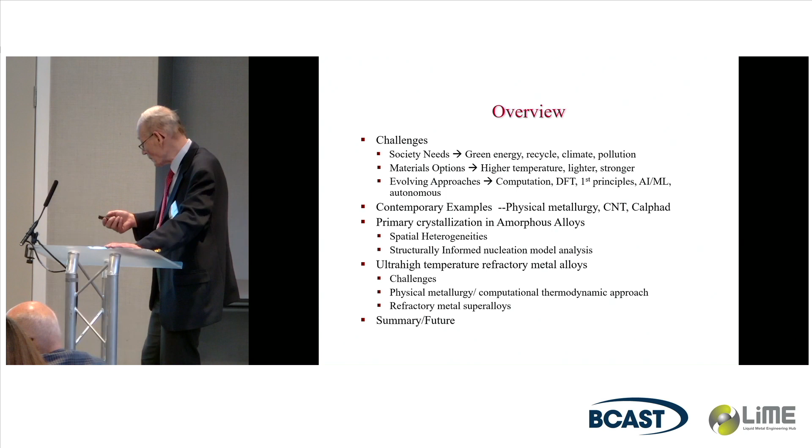So glass formation requires bypassing nucleation and growth. You can do it either with nucleation, such as window glass, or with growth control. Here, you recognize that the maximum growth rate is above the nucleation rate in terms of temperature. So you can quench in a material that has either some quenched-in nuclei or growth-inhibited phases.

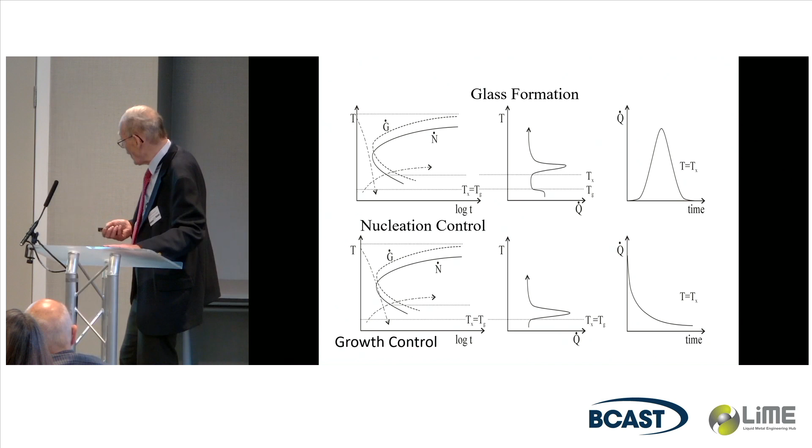And that was what we thought aluminum alloys were like. Lindsay put together this compilation and shows that the amorphous alloys, when they're partially crystalline or nanocrystalline — I'm afraid to use this pointer — actually go beyond the conventional alloy islands into the engineering ceramics.

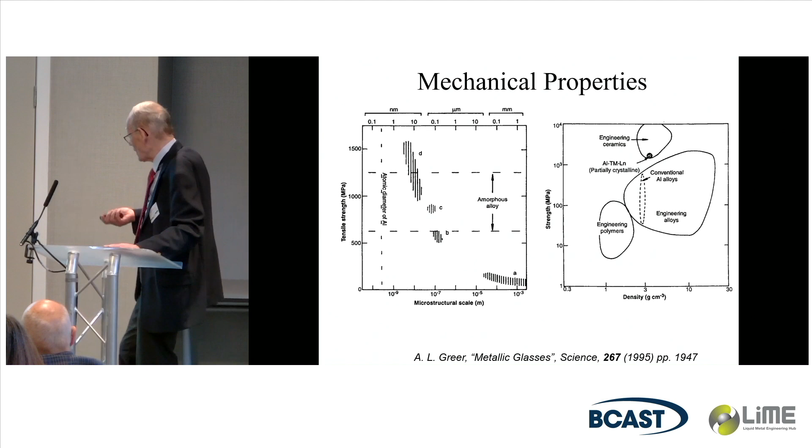So these are very attractive, being lighter and stronger, and on a specific scale, approaching steels. And this is the typical

crystallization reaction. The primary crystallization is one where you get this aluminum in an amorphous matrix, and because of the very high density of nanocrystals and the rejection of yttrium and iron, the growth is inhibited so that you can maintain that size. You can see before final crystallization, you have about a 75-degree temperature range up to about 350 or more. That's pretty good for an aluminum alloy.

And it clearly has to be heterogeneous nucleation because our compositions are hyper-eutectic, and you would expect some compound to form, like in aluminum samarium. The driving force for formation of aluminum is half that for the intermetallic phase. So there has to be some heterogeneous nucleation site to promote the primary aluminum.

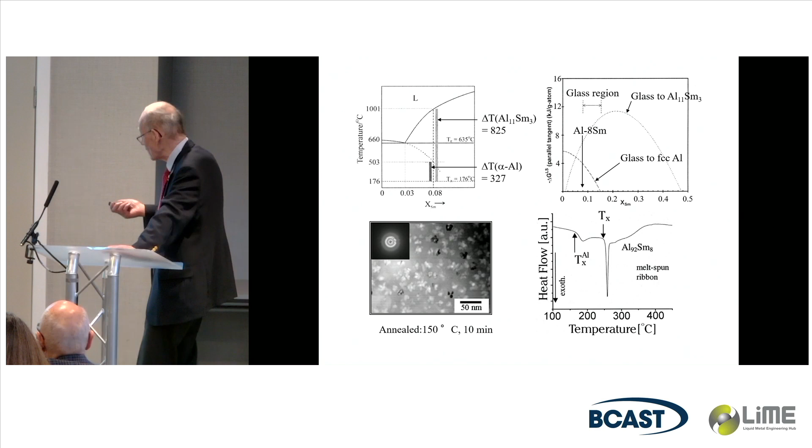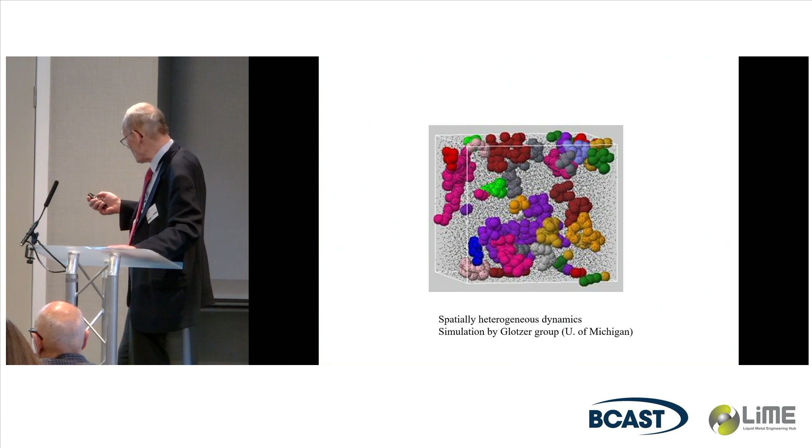And that turns out to be spatially heterogeneous groupings, and these are dynamic groupings. This is a computer simulation from Sharon Glotzer. But we have seen them in actual practice, and that's with a colleague of mine, Paul Voyles.

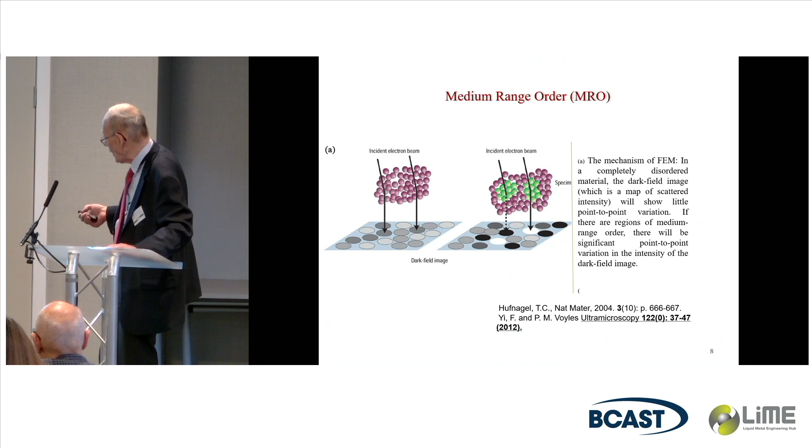We use fluctuation electron microscopy. If you have a situation where you have a spatially homogeneous material, then the fluctuation electron microscope image is mostly uniform in its intensity in the dark field image. But if it's spatially heterogeneous, you have groupings of atoms that are close together, then you're going to get intensity variations. By analyzing the intensity variations, you can back out what the type of clustering is, and the density, size and number density.

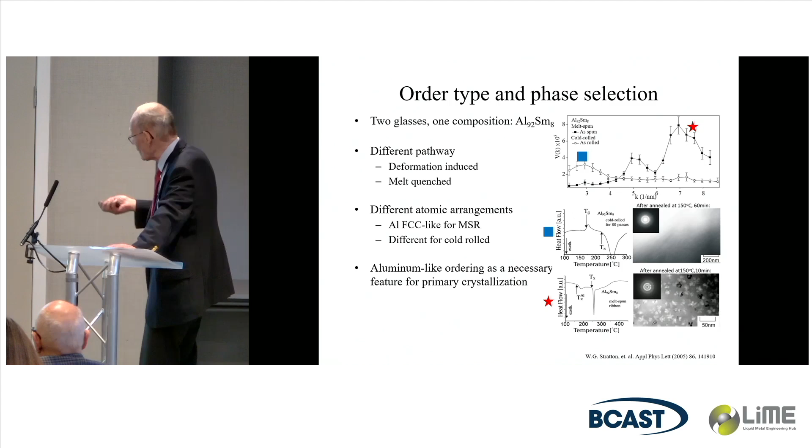And we've done that for these aluminum amorphous alloys after they've been quenched into the glassy state. It turns out that they have aluminum in their medium range order. So what that looks like is this: we have an aluminum-rich region which is not crystalline, so we get some constructive interference, but not enough to give diffraction spots. The solute atoms, iron and yttrium and others, are outside. So this is different than what other people have talked about with solute-centered clusters. These are naturally occurring, and it's not surprising since this has more than 88% aluminum, so you would see this.

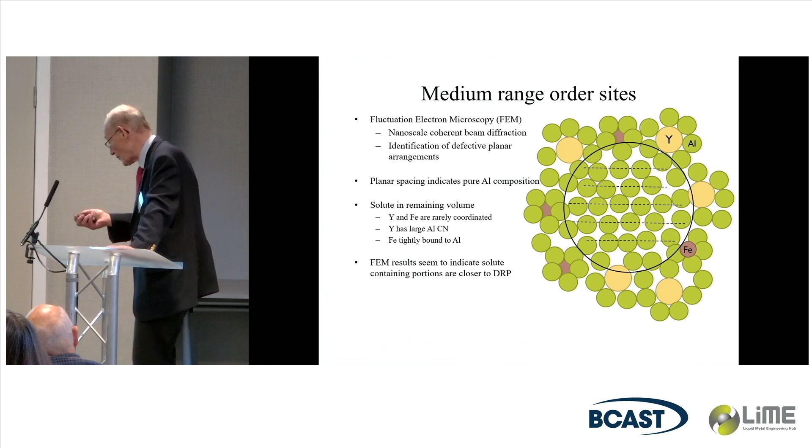But it's still amorphous, and so we want to account for the crystallization behavior. We measure the number density as a function of time at different temperatures. So this is our model: we have this aluminum-rich region that's a medium-range order, about a little bit less than a nanometer in radius, and it's surrounded by this nanocrystal.

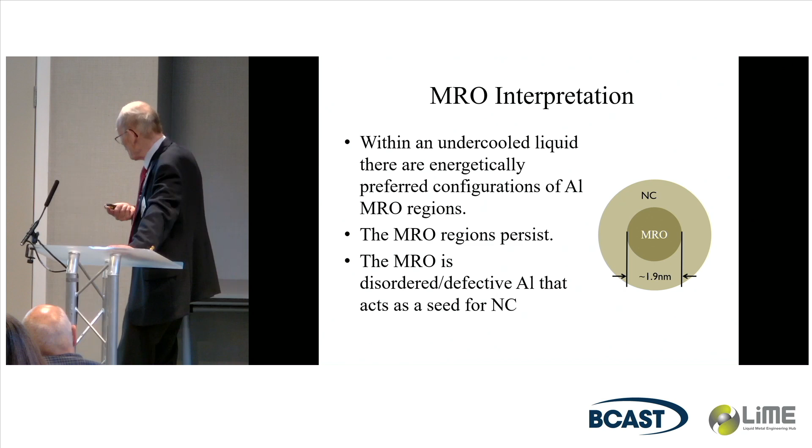So we replace the amorphous-MRO interface with a nanocrystal-amorphous interface and a nanocrystal-MRO interface, but that's very low in energy. And you can go through the seeded nucleation behavior.

And with this, you replace those interfaces. Because the MRO takes up part of the volume, it's a very effective heterogeneous nucleation site, and it's chemically the same as the nanocrystal. So we have complete wetting, and it acts as a very good seed.

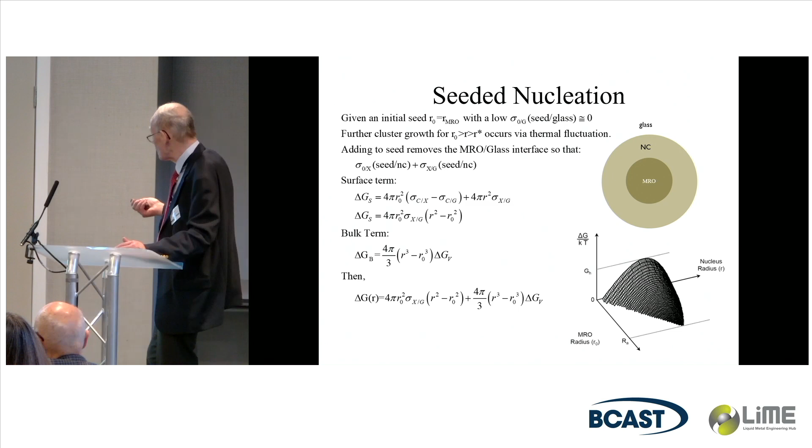When we go carefully through the interfacial energy using Spaepen's model and the driving free energy, which required a full CALPHAD evaluation rather than a simple undercooling approximation, we find the critical size is about 1.3 nanometers, which is bigger than our core of 0.96. Using the free energy and the interfacial energy, we find the barrier to nucleation is about 33 KT, which is all reasonable.

My student came to me very excited: it fits, my calculation fits the data. I said, yes, but it's on the wrong side of the peak. We're heating up, and your points match the calculation on the high temperature side.

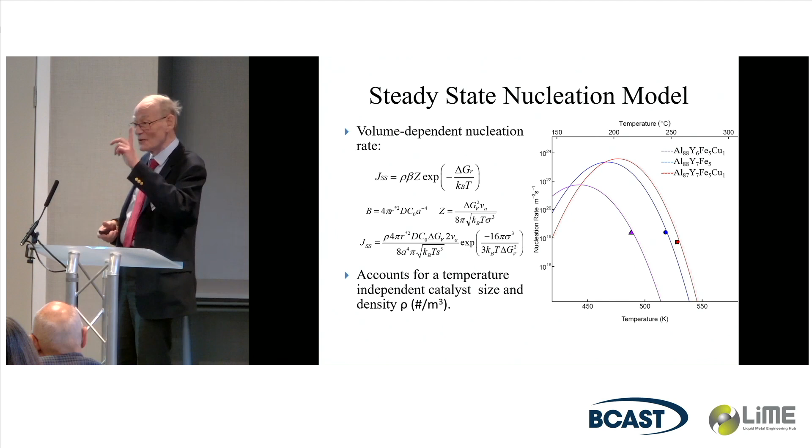What's going wrong? I want to remind you we didn't start at zero time. You put your sample in and start annealing, but no nanocrystals form initially. It takes some time before the first ones appear - this is a delay time. This tells us we have transient nucleation, which is very important, and is actually the main reason this forms a glass.

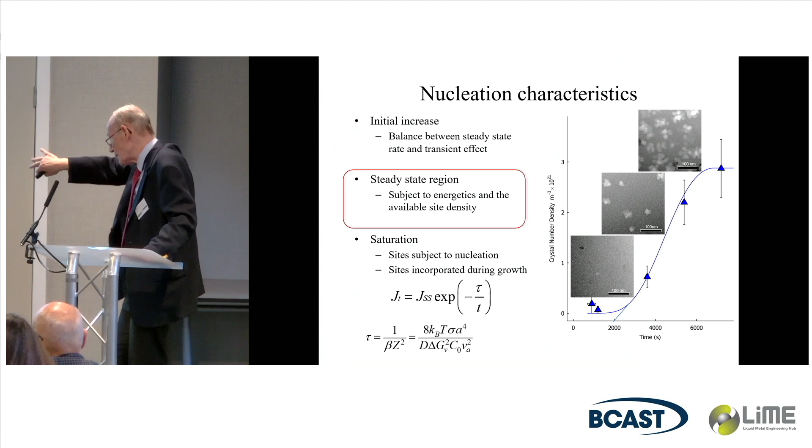So we had to measure the delay time. You can extrapolate the linear portion, but that's kind of uncertain, so we used...

nanocrystallization studies in a nanocalorimeter. Mettler produces this flash DSC, and by going at higher heating rates, you can pick up the glass transition very nicely. The Kissinger plot of glass transition versus primary crystallization allows us to separate the two.

Then when we anneal samples, we looked at them at different times. Measuring the glass transition, we have one slope associated with structural relaxation in the glass. Then once the nanocrystal appears, the composition of the amorphous phase changes, and we get a different slope because the glass transition temperature changes with annealing.

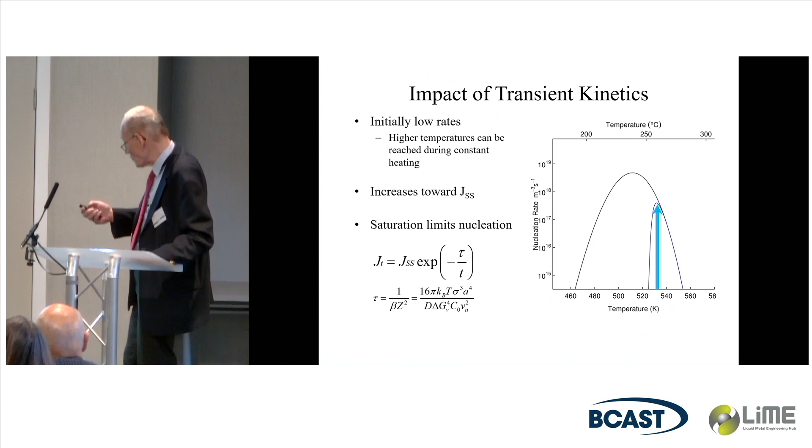That break point is a very accurate measure of the delay time. Using that, we've shifted the curve to higher temperatures, and now we have very good agreement. The curves fit our experimental points nicely, and we've gone through the whole analysis, carefully documenting each step.

When we do that, we have - Lindsay should be here - an independent test of plotting the log of the nucleation rate times the delay time versus delta G star over KT. There's good agreement between theory and experiment. So classical nucleation theory works, but you have to evaluate the parameters carefully. A lot of people take gross approximations and say theory failed. Well, that's not quite true.

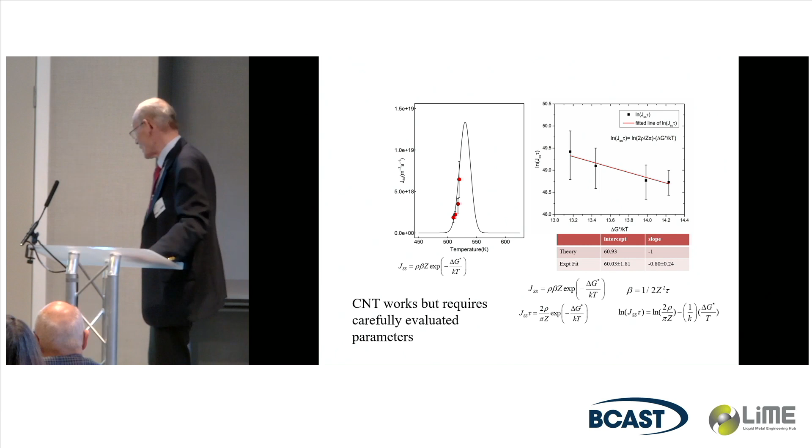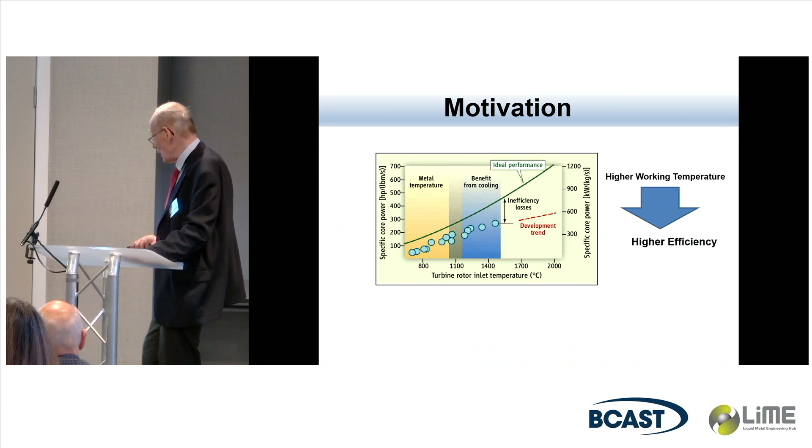So the motivation for high temperatures is shown here. Like Brian's, this is my most highly cited science paper - it gets not thousands, but hundreds of citations. It's clear that putting more effort into increasing the operating temperature another 10 degrees, which would cost a billion dollars and only return a few million in profit, means you have to question whether we're going to push these nickel-based alloys much higher. They're already operating above their melting point, and only survive because of the thermal barrier coating and the internal cooling.

One of the systems we've been looking at as part of an ARPA-E program is the moly-silicon-boron system. Here there's a black triangle between a molybdenum solid solution and Mo3Si phase, and a ternary intermetallic Mo5SiB2. This phase is very densely packed and has a very high melting point - the liquidus temperature is above 2100 degrees Celsius. So these alloys have excellent high temperature properties compared to the latest generation of nickel-based superalloys, with creep rates orders of magnitude lower.

However, they have limited ductility and undergo a ductile-brittle transition. Their oxidation resistance is good, but not great enough - the recession rate is a little too high. So these are issues that have to be solved. I want to point out that the T2 phase, this ternary intermetallic, is not a line compound - it has a width to it, a homogeneity range.

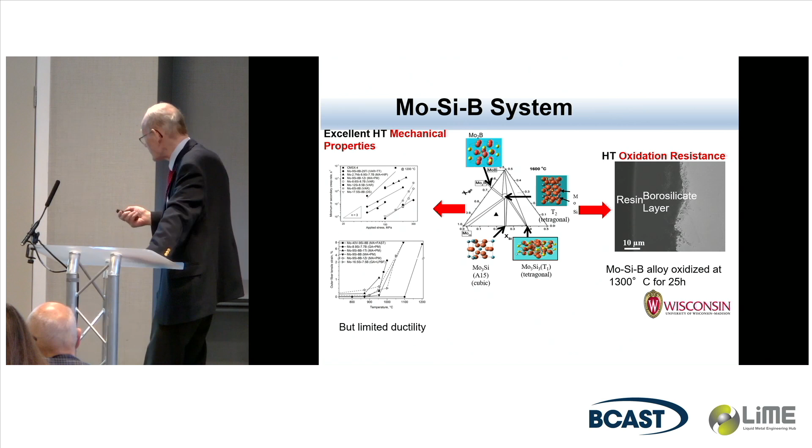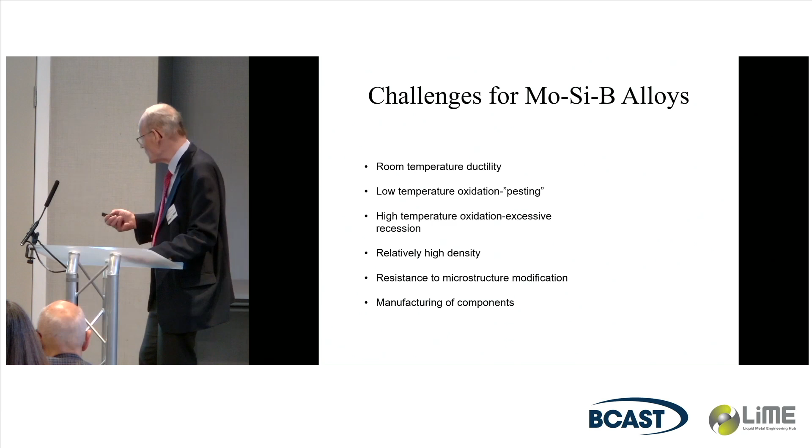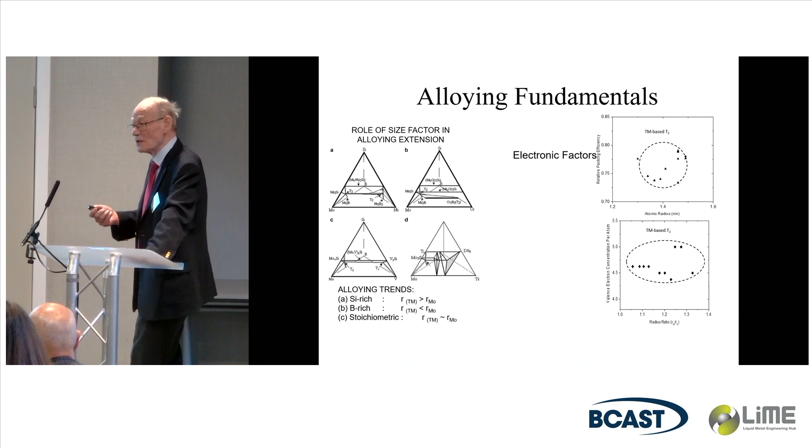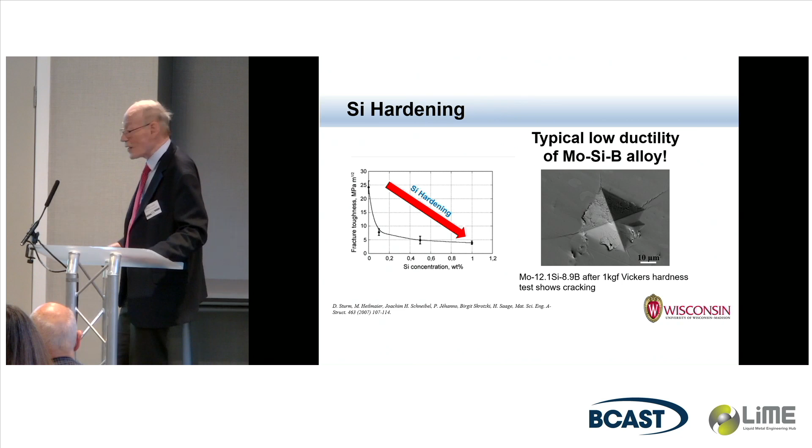So we've solved each of those problems. The first is using what I call the Hume-Rothery rules of intermetallics or silicides. We have a size difference and electronic factors that allow us to predict solubilities with good accuracy. We've looked at the literature, and there's reports that the problem with molybdenum-silicon-boron is the silicon. Silicon is the most potent solid solution strengthener in molybdenum. We have too much strength, so we have to reduce the silicon content. But how do you do that when you have a guaranteed solubility?

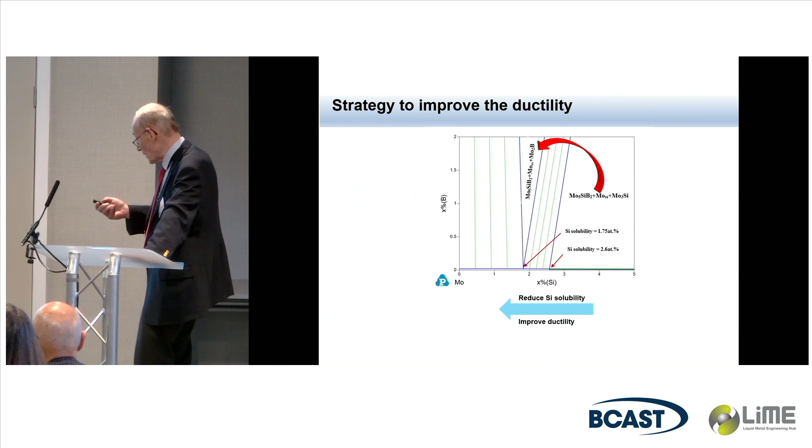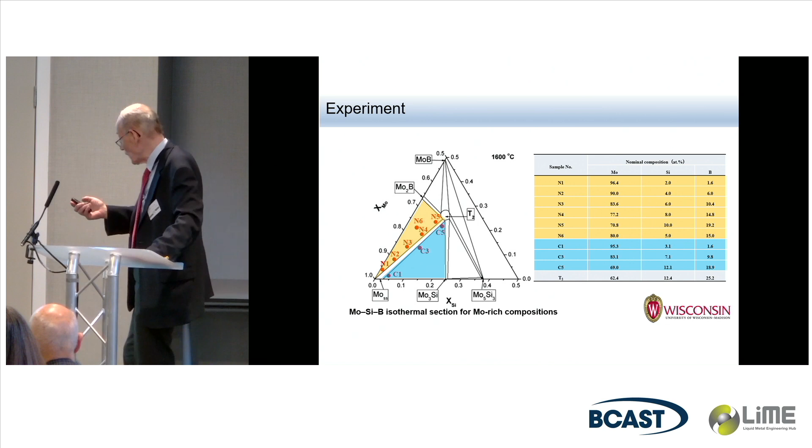Well, we go to the other side of the phase diagram, which has much lower solubility. So we've reduced the solubility from 2.6 to 1.75, and that improved the ductility. We compared alloys N3, which is molybdenum T2 Mo2B side, and C3, which is the molybdenum Mo3Si T2 side - they're just on both sides of the two-phase field between molybdenum and the T2 phase. When we did that, we found not only did we reduce the solubility, but we got precipitates of molybdenum in the T2 phase.

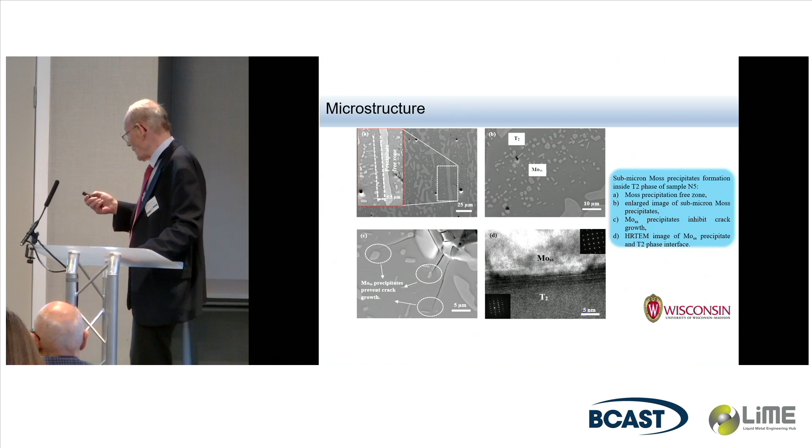That's because as you go up in temperature, entropy opens up the T2 phase, and so as you cool down from the melt, the T2 phase is supersaturated with molybdenum. As you anneal at 1600, you actually precipitate molybdenum inside the intermetallic, which is sort of the reverse of what we normally think of. So instead of precipitation hardening, we get precipitation toughening - the molybdenum precipitates in the T2 phase arrest crack growth.

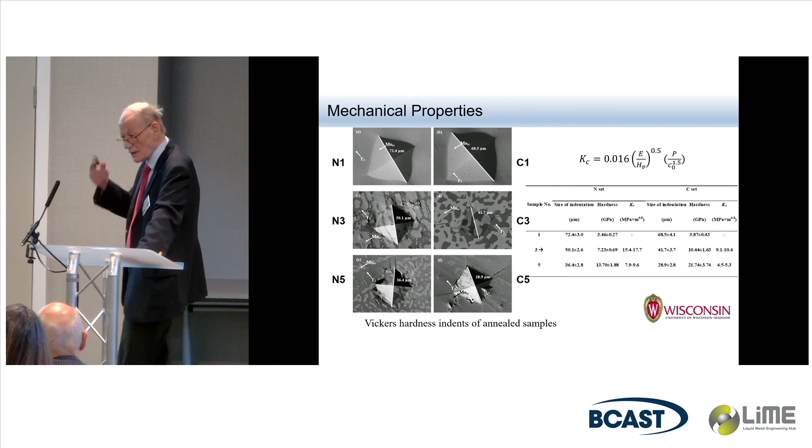And as a result, our toughness went up based on crack formation - it's around 15 to 17 MPa root meters versus 9 on the other side of the phase diagram. That puts us in the range where we had about 50% molybdenum solid solution, so the toughness is up with the best alloys that have been produced by powder metallurgy.

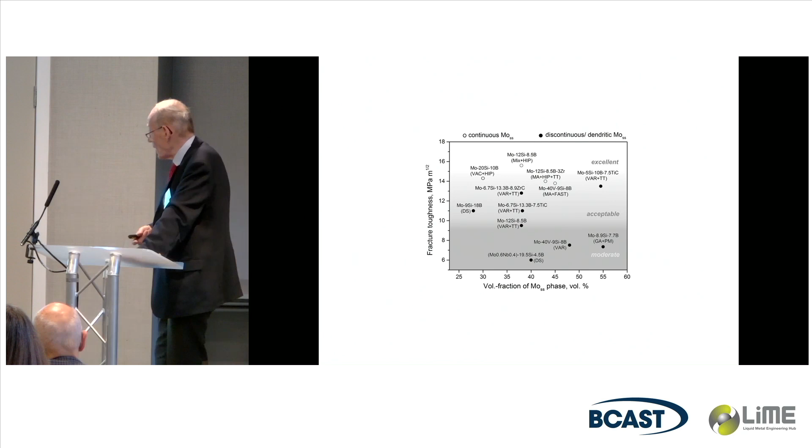All right, so now we have to make these. Our ARPA-E program is called ULTIMATE, and here we're using additive manufacturing to make components that will eventually be turbine blades, with an increase in operating temperature of 200 degrees for a 10% efficiency gain, and we're supposed to reduce the cost by 20%.

Well, one of the challenges with additive manufacturing is that most of the papers deal with alloys that are readily available in powder form - titanium 6-4, various stainless steels, some Inconel alloys. But is titanium 6-4 the best alloy for additive manufacturing? I doubt it. But how do you screen different alloys when you have to rely on alloyed powder? It's very expensive to do a powder run. Well, you can take elemental powders and try to melt them, but if you have things with vastly different melting points, like titanium and aluminum, your composition control is kind of tricky, because once you're melting one component, you're vaporizing the other. So how do you do this in a reproducible fashion?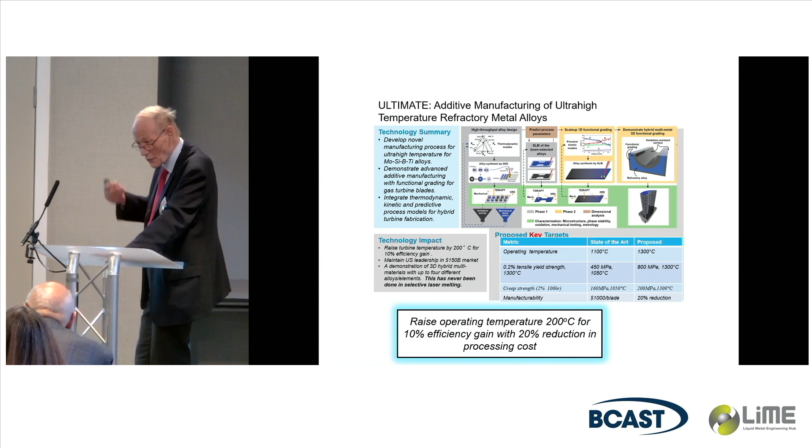Because additive manufacturing is perfect for doing high throughput screening, if you could do it. So we thought of using thermodynamics again, and just reaction synthesis. So I take silicon nitride, boron nitride, and molybdenum, and I can produce any alloy I want in that three-phase region. This is an example where we form the T2 phase, Mo5SiB2, and release nitrogen.

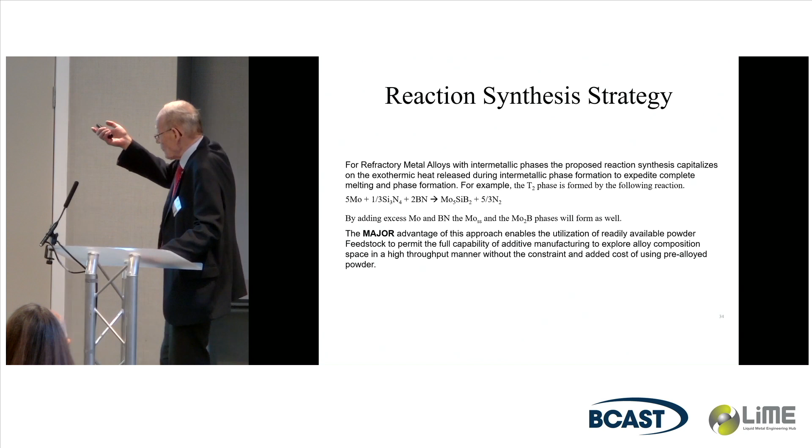If I want other phases, I add a little bit more molybdenum or more boron nitride, and I can balance out and get any composition in the phase diagram. All of these components have similar melting temperatures, so I'm not going to lose anything - the only thing I lose is nitrogen, and of course nitrogen has very limited solubility. So, and these powders are pretty cheap compared to pre-alloyed material.

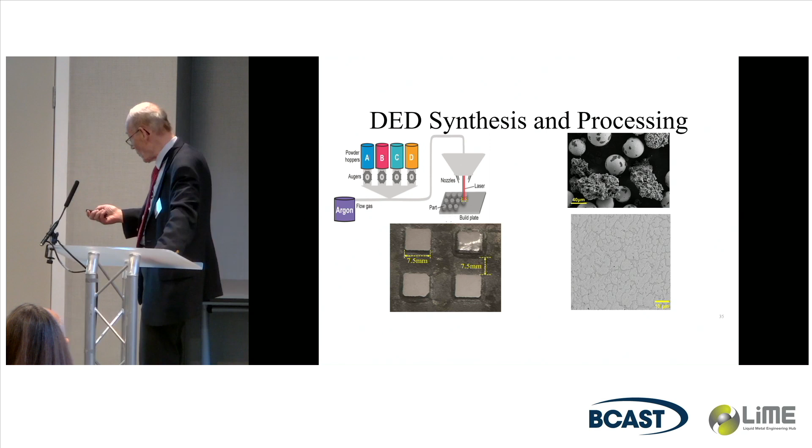And this is what we've done with directed energy deposition. There are hoppers - these are the feed stock - and we get a fairly uniform fine grain size. That's a 10 micron scale marker. We get the right phases. We get titanium boride at the build plate, at the plate, and you can cut that away, so it's not a big problem.

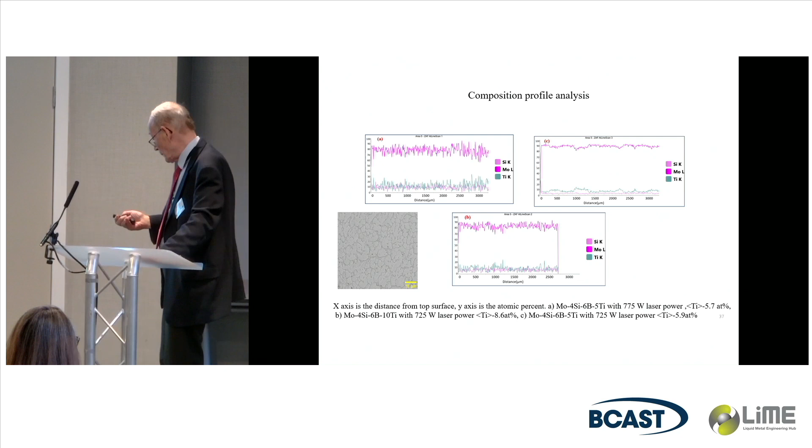Compositional uniformity - we've added titanium as well, but over millimeters, these are thousands of microns, so it's uniform, going from the bottom to the top on the build. The other advantage is that we had to reduce the density to below 9, so we added titanium. My colleagues at Computherm pointed out that with 10% titanium, we can even reduce the silicon solubility further - so now it's about 0.2%.

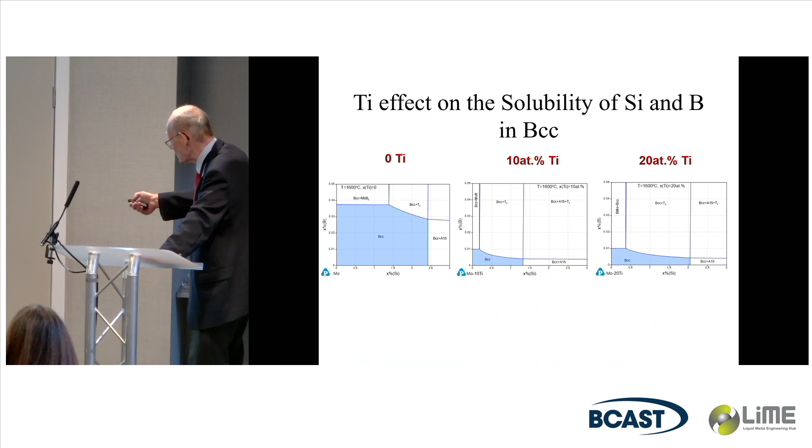More titanium doesn't help us because it pushes this out again. So 10% titanium satisfies the density profile which they've calculated, and we can now produce samples with this composition that have about 1.5 gigapascals of strength and ductilities of more than 20%.

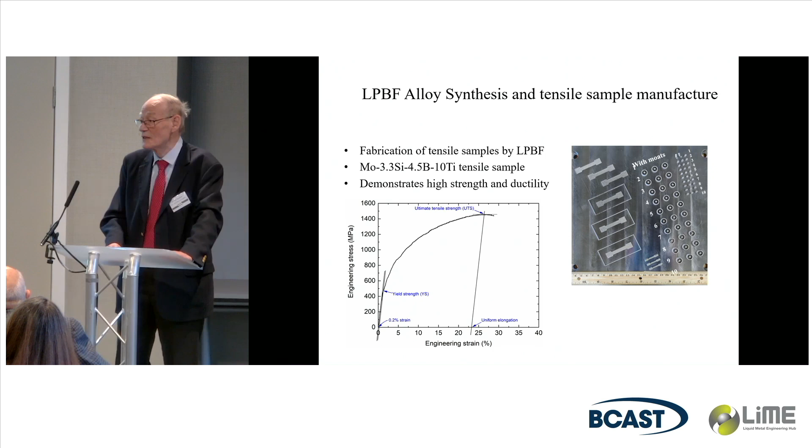We're now preparing samples for creep and fracture toughness and thermomechanical fatigue. So again, with the application of alloying fundamentals and innovative processing, we've overcome all the challenges in the molybdenum silicon boron system: room temperature ductility, toughness, low temperature and high temperature oxidation resistance. I didn't talk about it, but we have a coating that takes care of that. Density guided by computational alloy analysis and manufacturing. So I think out of this program we'll get a refractory metal superalloy that'll replace the nickel and allow us to really improve the efficiency of these engines and power output.

And thank you for your attention.

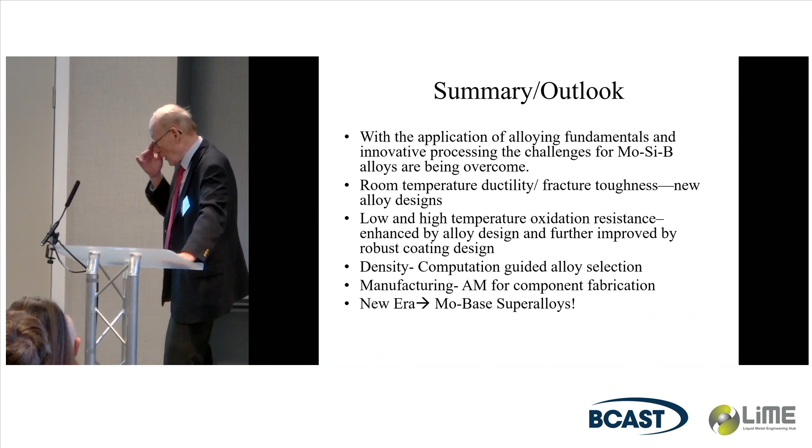Oh, I forgot one other thing. Okay, so what's the future?

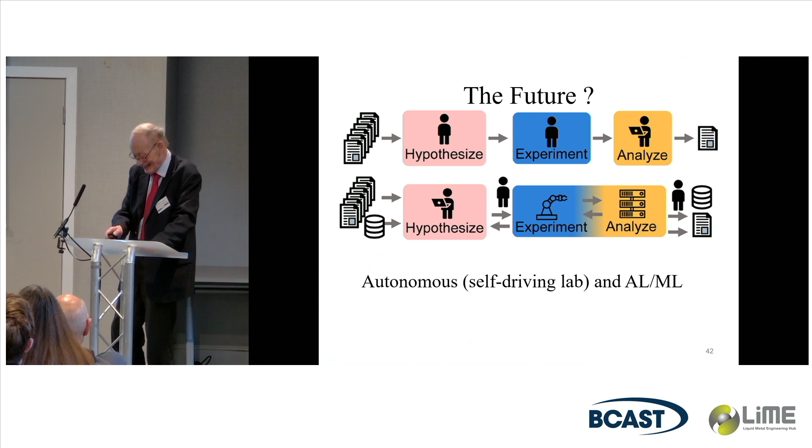Questions? So thank you very much.

Very interesting work. Can I ask, you mentioned in the beginning that the molybdenum silicon boron alloy has low oxidation resistance, and at the end you said... Oh no, it has oxidation resistance, but the recession rate, that is the diffusion of oxygen through the scale, the borosilica, reacts with the underlying alloy to too great an extent.

We've addressed that by changing the boron to silicon ratio in the coating and adding a little bit of aluminum oxide. So we've annealed samples in air at 1700 degrees Celsius for days, and the weight change is 1 milligram per square centimeter, which is negligible.

Yeah, that's impressive. And how about, you also mentioned the higher density compared to the nickel superalloys. Right, current nickel superalloys are approaching 9 because they add a lot of tantalum, rhenium, ruthenium, heavy elements, and those are present in a couple percent, not just minor additions. So the density is about 9 for the current generation of nickel-based superalloys. My density is 9. I brought it down from 10 by adding titanium.